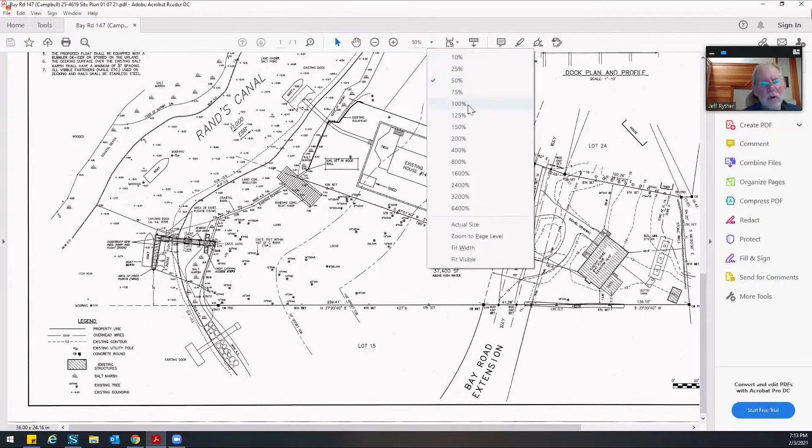All right, looks good. So there's a float at the end—it's a finger float, and we show the boat on the outside of it, with 5 feet of water at that point. Across from that we have a sounding of about 4.2 feet, so there's pretty good water there. Not so good towards the north, but an improvement over the existing. The existing float grounds out every tide, every low tide, and we can improve that by moving this float out 9 feet and keeping it narrow, because it's a dredged channel—meaning the earth was removed under the float area.

And so we've got these very deep soundings, and then just adjacent to it is the existing float, and it sits on the bottom. So that shows you how steep the cut is. And there's a profile up in the upper right of your plan.

It shows how the bottom changes pretty drastically. Anyway, I mentioned that the channel was dredged, and this channel is pretty much man-made at this point. There's a lot of bulkheads and stone riprap, docks at every lot, and we're just trying to fix this one that's in dire need of an upgrade.

So I meet all the lot line setbacks. It meets the Army Corps 25% rule, if you don't know that one. On the plan, there's a 19-foot dimension from the mean low water to the outbound or seaward end of the float. And then across the channel, we got 76 feet to the mean low water. So if you put 19 over 76, you get 0.25. So I'm right at the maximum to put it out.

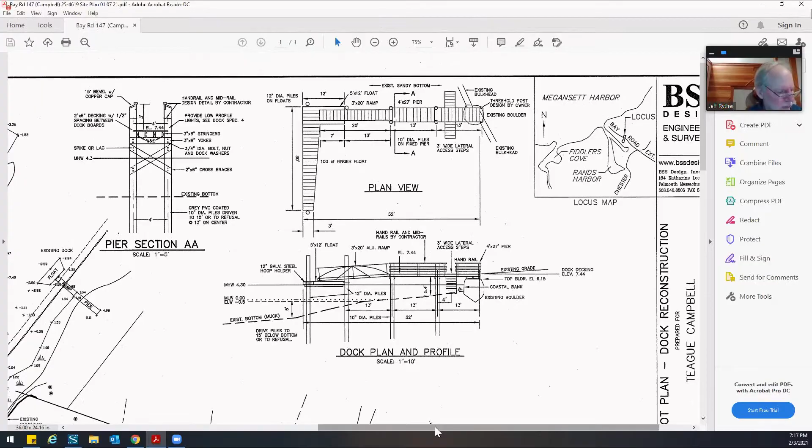When we were doing the soundings, we found this area to be extremely mucky as well. And one of the reasons, if you look through the report, I didn't hire anybody to do a shellfish study. Very expensive and hard to find people that do them now. But they're out there, and this was because it was, again, man-made area, very, very mucky.

And the quahogs are up along the wall, where I've seen a couple of soft shell clam holes, but nothing really around where the dock is, more over towards the new boat ramp, if you went out there.

So one of the things we've done that may have been a bit of a mistake, and I'll confess to that, is the width of the dock. I should have made it a little bit narrower, and I can do that easily by making the boards. It's actually framed for a 3-foot dock, but it's got some overhang on the decking, so we can narrow that down and meet the DMF's 1.5 to 1 rule.

There's a lot of rules on these dock designs, but I think we meet them all. And I'll just touch up that cross section, and we'll be all set.

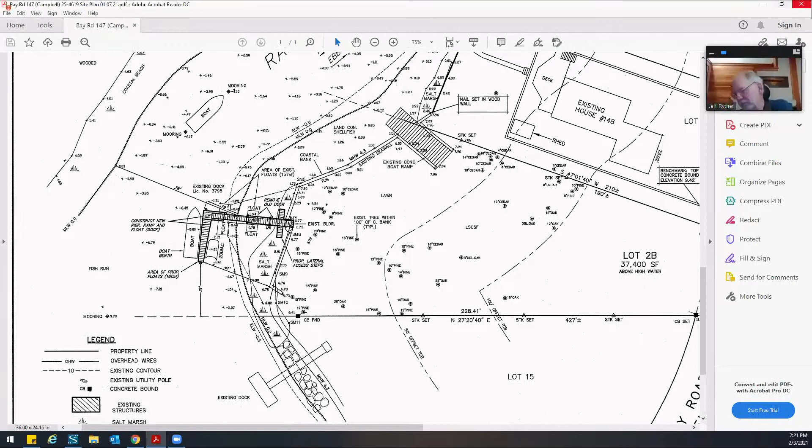Jen, you want to start? Yes, Mr. Chairman.

As the staff report says, as Jeff has explained, although he is making improvements to the dock to get it into deeper water, it is larger than the existing dock, and this board has always required a shellfish survey for that. I understand they're expensive, but that's a requirement this board has always held to—if you're expanding these structures and moving them further into the resource area, a shellfish survey needs to be performed. So that was the first thing.

The second thing, and you may be able to handle this Jeff when you reduce the size of the float: the existing dock's terminal float is actually only 108 square feet according to the license. The 157 square feet Jeff mentions in his plan is that end float plus the float underneath the ramp that was used to hold the ramp up off the salt marsh. So together that's 157 square feet, and the applicant is requesting 160, where your regulations generally limit the size of an end float to 100 square feet. So it is a substantial increase over what the regulations allow.

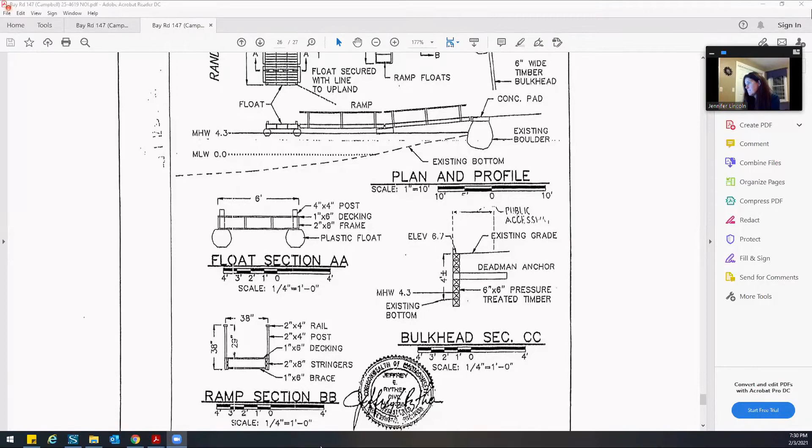That's got that one, that's the second page. It shows some depths. There you go, Jeff. Okay, it's the one at the bottom there that's darkened in, right here. It has... well, you can see at each end of the dock, it doesn't really indicate. We used to put the sounding, the decimal point, on the location.

So we have 1.6 at the outer face and 2.1. That was at the time that the license occurred. Right, that was in the 90s. I'd have to look, okay, so probably hasn't shown up. It's 93. That was during the interim period, the 5 years there.

It shows very similar conditions as far as the tide lines. It has that same shape if you look at one plan to the other. And so this won't represent any kind of impediment to navigation? Well, the harbor master said yes, and so they all say yes, because when you change the shoreline with the dock, then you've changed the navigation, but it's not really a full negative.

It meets the Army Corps regulations for maneuvering in a channel. So this thing can't be out any further than I drew it. And the reason I drew it where it is, again, is to go for that deepest water that's permittable.

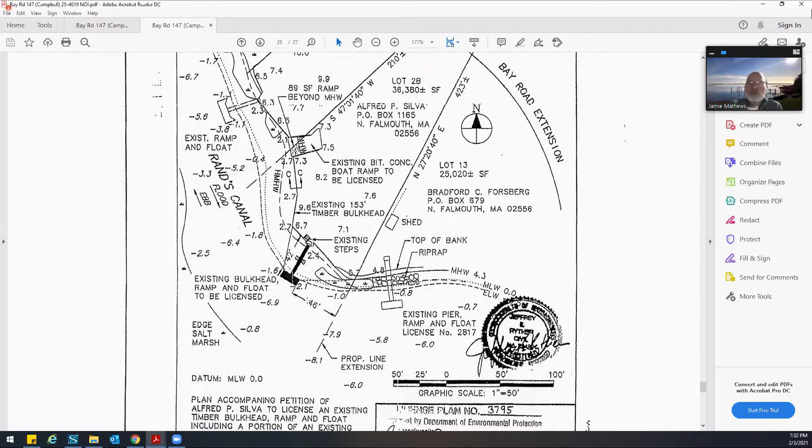I think I agree with Jen. I'm sure that they can redesign the dock float to get back within our regulations without exceeding them like it currently does. That's all. All right, Maury?

I agree with Mark and Jen. What happens is everybody keeps getting bigger boats and then they want bigger docks. So we just can't keep going down that rabbit hole. And I really hope that the height of the dock would allow walking underneath it instead of that public access through the salt marsh. Yeah, that'll be removed.

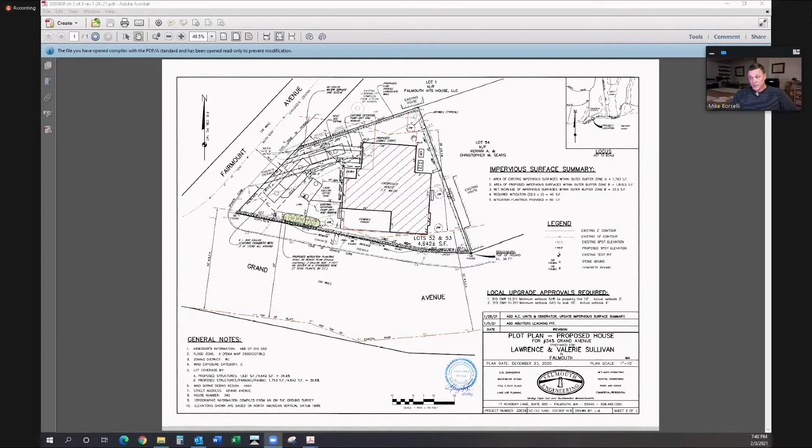Basically, there was a small section of existing deck that we had neglected to show on the plan that's been incorporated into the existing conditions plan and the proposed plan. We can't ascertain its age, but it is proposed to be removed, and it didn't really come into play on the mitigation calculations. We're continuing to still provide the original amount of mitigation planting. We didn't try to take credit for the deck removal, even though it's being removed, because we couldn't really see it in the photos and in the shadows. So that's it on that item.

We also have now since added a proposed generator and AC units tucked into this little jog nook of the proposed house. And that sums it up. I'm happy to answer any questions.

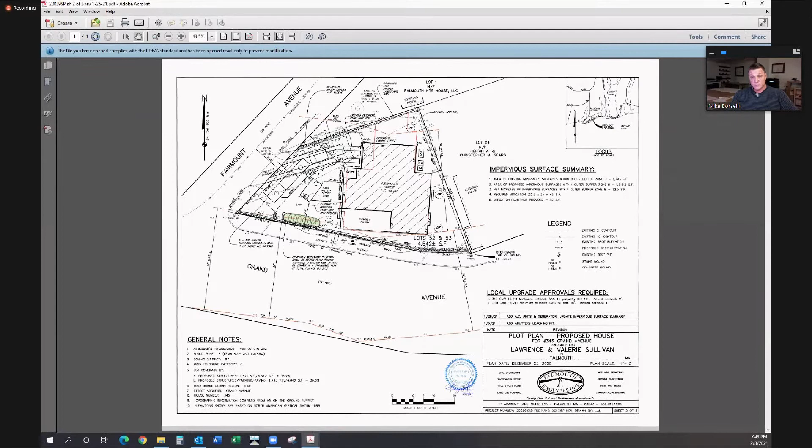Excellent. Thank you. Jen, do you want to start? I have no questions or comments, Mr. Chairman. All right, unless Kevin has something to add, Mr. Newton. I have no additional comments. Thank you. All right, we'll go down and ask everyone anyway. Maury? No comment. Pat? No comments. Peter? No comment. Steve? No comment. Betsy? No comments. Courtney? In the interest of continuity, no comments. Kevin? No comments. Mark? No comments. Mike, my only comment is thank you for clarifying all that. You're very welcome.

Jen, is there any public chat function comments? No. Like to make a motion to close this hearing and take it under advisement. Carla Hawk, second. All right, we have a motion and seconds to close this hearing and take it under advisement.

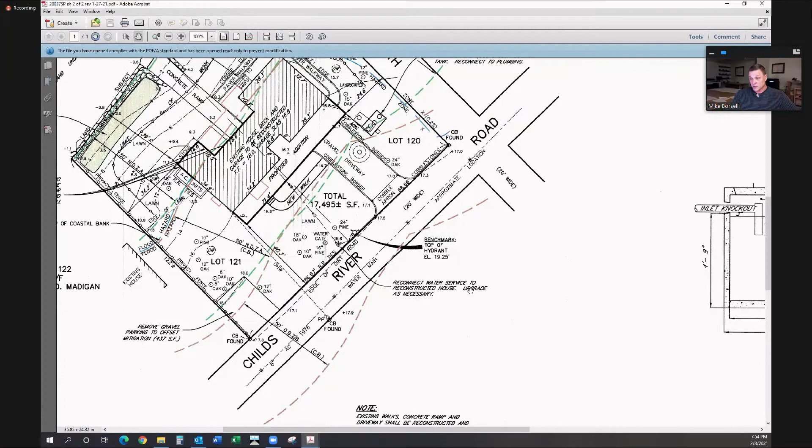I think that's everything. I added a note about the water service. That was as a result of a comment from the water department, because this is also before the zoning board of appeals. I just added this note to reconnect the water service to the reconstructed house and upgrade the service as necessary. I think that sums up the plan revisions, and I'm happy to answer any questions.

Thank you, sir. Jen?

Mike, can you do me a favor? Can you explain once again why we have to have the 1,500 gallon tank, and not the 1,000? They don't allow 1,000 gallon tanks anymore, so we have to go with the 1,500, but there's no increase in design flow, correct? Correct. You summed it up perfectly.

Okay, there's a reason, I just want to clarify that. Yeah, so the house is being reconstructed in a way that there'll be no increase in bedrooms. But, let me share my screen again because I'm pointing at it without sharing it, which seems to be a habit of mine lately - this addition here on this side makes the existing septic tank, which is here, too close. The minimum setback is 10 feet. So because we have to replace the tank, and the minimum size used to be 1,000, the Board of Health in Title V requires that the tank be upgraded to a 1,500 gallon tank. So we basically did it for that reason only. There's no proposed increase in bedrooms.

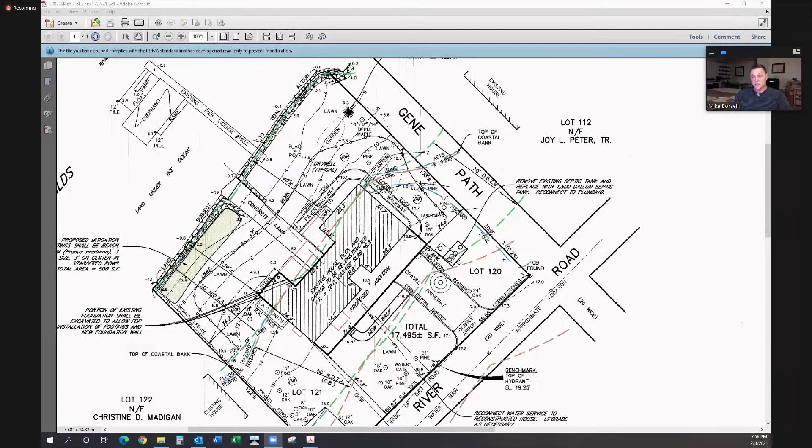Anything else, Jen? No. Mr. Newton, you have anything to add?

Mike, I don't know if you know the answer to this, but do you know if there's in-ground irrigation on the site? There is. The reason I know that is I was there one day, and it was interesting that even though the house was unoccupied and burned, the irrigation went on one day when I was there. Oh, okay, it's there. Yes. Okay, well thank you, that's all I have.

Thank you, Mr. Chairman. All right. So Mike, just for my own curiosity, if you weren't putting that front addition on, you wouldn't have been touching that tank - you wouldn't have had to change it, correct? Correct. Yeah. Okay, thank you.

All right, Betsy, no comments. Courtney, no questions or comments. Kevin, no comments. Mark, no comments.

Maury. Mike, was that old tank an H10 or an H20? I don't know. Yeah, so probably it's better anyway that it's being upgraded to an H20. Yeah, it's very close to the driveway. Yep, thank you, no comments.

Pat, no comment. Peter. Jen, we had some discussion about some fencing - was that resolved? I don't believe it was, Peter.

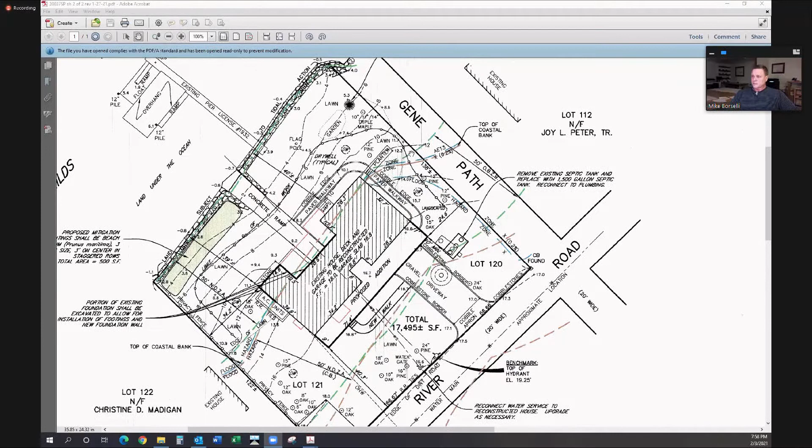Good point. Mike, did you get - so they're putting the mitigation vegetation on the south side, correct? Yes. And they're gonna keep that little metal fence there? You were gonna look into that for us. Well, yeah, they have grandchildren and they're concerned about the riprap. They want to keep the fence there, it's been there for a very long time. But there's a privacy fence on the south side, and there's no fence along Gene Path, correct? Correct, there's no fencing along there. Yeah, okay. I guess they want to keep it, Peter.

Okay, no further comments. All right, Steve.

The driveway is gravel, it's not - it's pervious. Yes. Okay, we received some comments from the Waquoit Bay group, and they would like you to look into denitrifying systems for the house, for the septic systems.

Just a suggestion, I'd like to put it out there. No other comments, thank you. I think we'd all like to see denitrifying systems, but hey.

Jen, is there anything in the public chat function? There isn't anything in the public chat, but the Waquoit group wanted us to read their comment into the record, Mr. Chairman. It's been distributed, no? It has, but they specifically requested that I read it. Yep, go ahead. Comments from the Citizens for the Protection of Waquoit Bay.

We are happy that the Nortons are going to rebuild their home and wish them all the best. We propose some changes to the plan that would make it much more beneficial to the environment, the Childs River, and Waquoit Bay. The Childs River is one of the three main surface sources of fresh water to Waquoit Bay, which is, contrary to the application, an area of critical environmental concern.